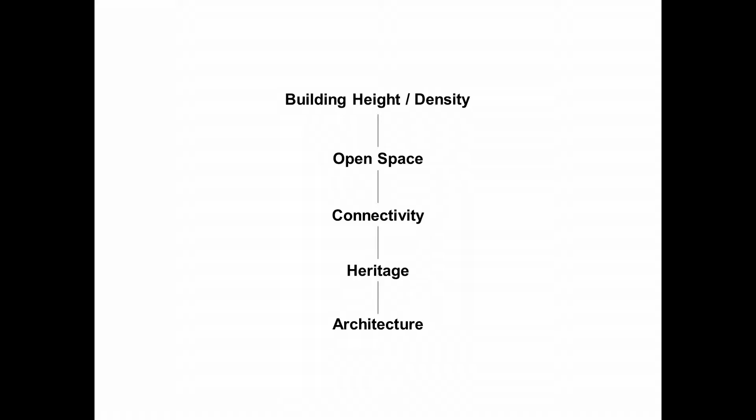Let's look at the issue of building heights, which is inseparable from the issue of density. Because building high used to be just a matter of ego, but in 20th century New York, 20th century Hong Kong, building high is actually a solution to our problems, and it's going to be a solution to most of the world's metropolises going into the future. It allows us to escape a scenario like this in Beijing or in LA.

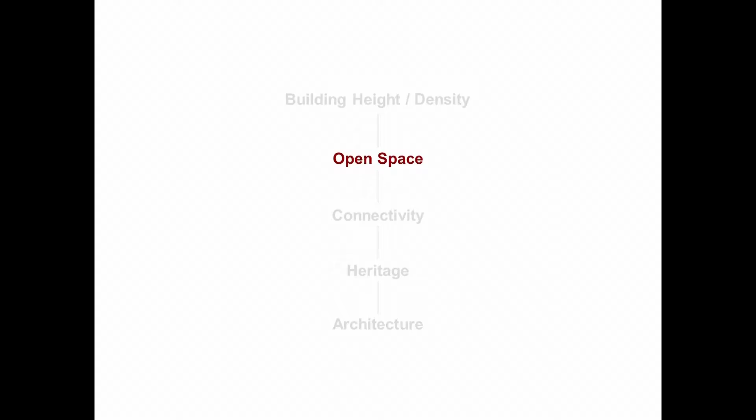The issue of open space is the other thing that needs a consensus, I think, on how to move forward. Because we are not New York, we don't have a Central Park. We're not London, we don't have a Hyde Park. We do have a series of pockets of open space distributed somewhere, for historical reasons or whatever reasons.

We could always ask for more, but I think we should ask for something else - better quality and better accessibility instead of just asking for more. I've always advocated that once we had this waterfront promenade in place, we should link our existing parks and gardens into one continuous whole. So when we designed Tamar, creating this green carpet was really with that objective in mind, completing a vital link between the future waterfront, the city, Hong Kong Park, and hopefully the botanical gardens.

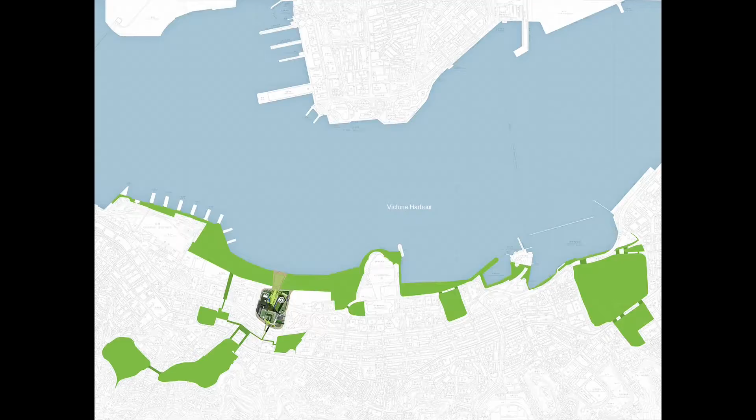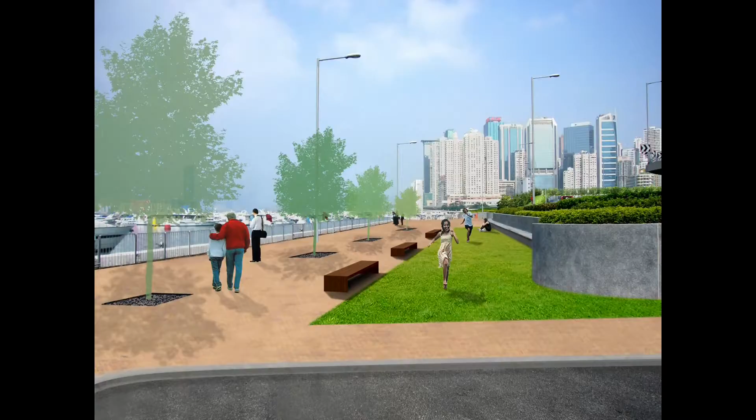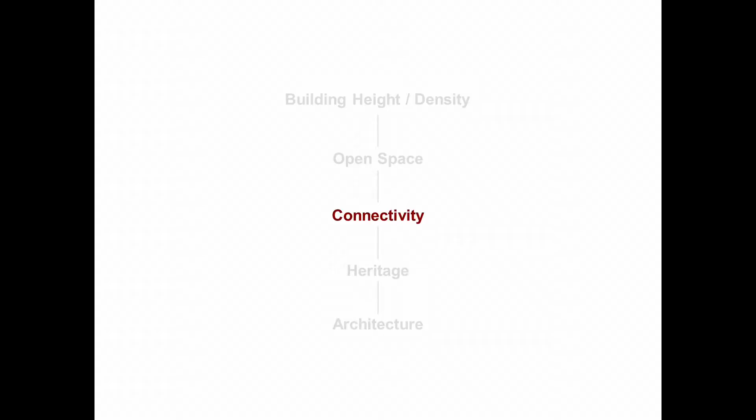We talked about a lot of connectivity, but we have to realize that connectivity is not just connecting point A to point B. This is not what we want, although it serves the purpose. We are talking about an integrated connectivity - spatial and visual integration, a fusion of the public realm and the private realm to make it interactive.

When we talk about heritage, we should not just be talking about keeping things as it was. We should be talking about energizing it. One of the things that could energize things is to add new elements, like the roof on the Lyon Opera.

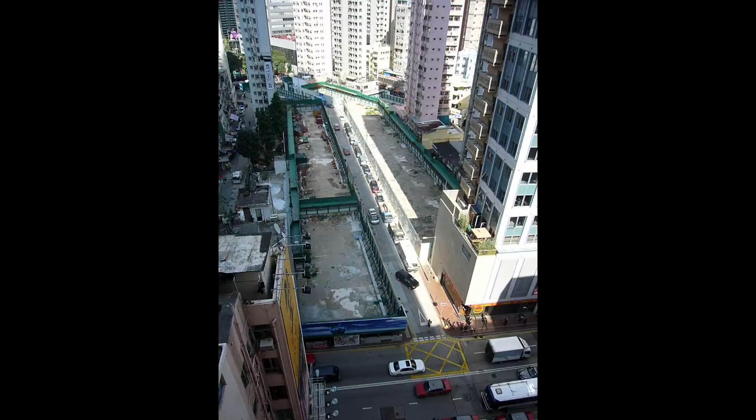So when it comes to the east wing or the west wing of the central government offices, what I had hoped for was some creative intervention of the new, which didn't happen, unfortunately. The same applies to redevelopment of whole districts - we don't want wholesale demolition, but we can't afford to keep things unchanged. So what we should be looking at, something we did for Guangzhou, is introducing something new to integrate with the old so that 1 plus 1 is greater than 2.

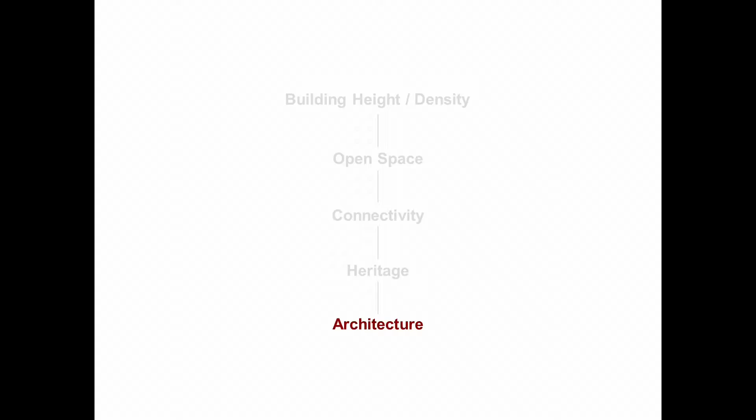Which really brings me to this last point: in these traditional streets, it's not just the public realm, it's the buildings around it and the whole ambience that contribute. So architecture is an important element in urban design because it provides the proper setting and contributes to the ambience of the place. Once upon a time, we had architecture that could do that - nothing spectacular, but something human, with proper scale.

But since then, these become the norm. And when it comes to economy of operation, standardization of bay windows, balconies, and so forth have all led to rather inhuman architecture that did nothing to enrich the urban environment. Not only that, our current building laws have left us with almost just one building typology - a tower and a podium. And the worst case is that the podium is a car parking podium.

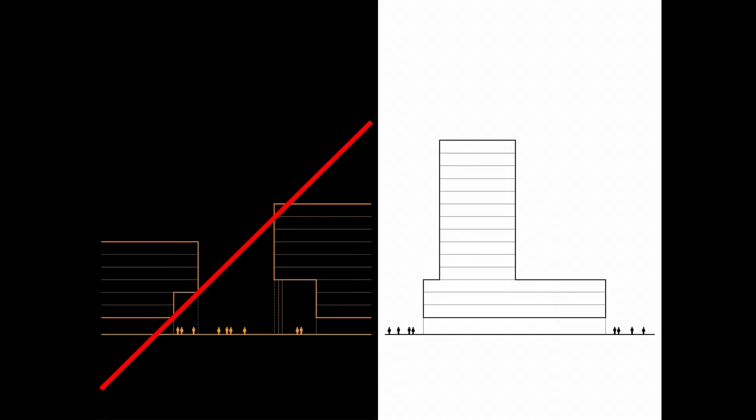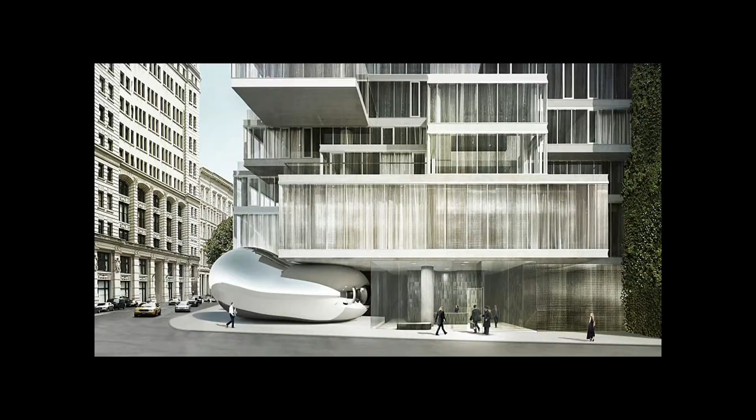So we want to create something creative. That is not encouraged under the building code unless you are willing to put up with great loss of development potential. That is not a profile that is permissible under the building code - nor that. So projects like these, probably something a final year student could dream of, are not possible, simply because they're practically not encouraged. Nor that, nor these.

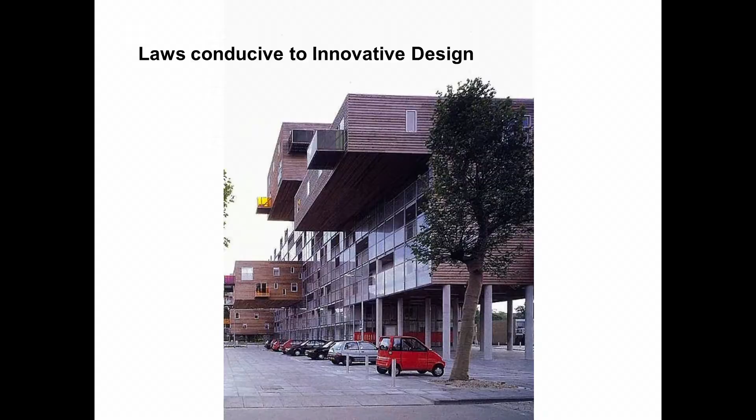So what we need are new laws, building codes, that are conducive to innovative design - and that is the last factor in creating a better urban environment. So what I had hoped for is that we have a new metro plan that could consider holistically a combination of all these issues, and a review of the buildings ordinance that could consider, apart from safety and health, all the issues related to good architecture.

Now, that was 2008. The dream didn't come true, of course. There's no review, there's no metro plan. Today is the 22nd of April, 2016 - so where are we now? Now, Kerry just worried that I would be too critical. Don't worry, actually things are not that bad.

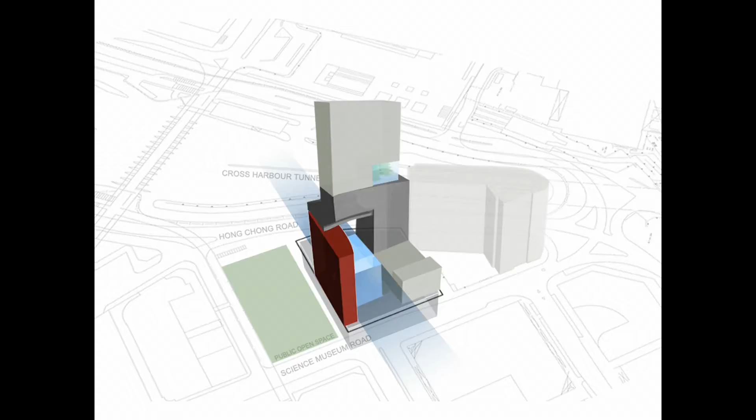On the issue of building height, we won some battles to break away from an artificially kept low height for some buildings, like Hotel Icon on the waterfront. We argued with the planning department and the town planning board that by breaking the heights, we managed to create a building that is visually permeable, that has ventilation through its middle, enhancing the microclimatic condition on both sides. And it is transparent.

It also allows us not to occupy fully the ground, creating courtyards both on the hotel side and on the school side. And it allows us to use levels up in the air for meaningful amenity usage. And when you look at it from the waterfront, although it does stand out, it's actually part of a fairly natural skyline. I'm glad to learn that since then, the planning department has relaxed the height restriction of all the buildings on Tsim Sha Tsui East, so that in future, if they do develop, they would probably not have to have really solid blocks all the way down to the ground like that.

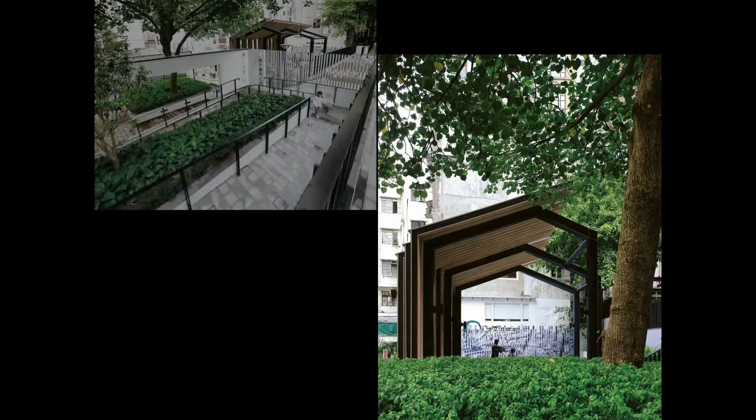On the issue of open space, we have since 2008 a number of really well-designed open spaces with quality and reasonable ease of access, like the Kwun Tong waterfront, credit to ASD and the Kowloon East Development Office, like Oil Street Depot, a courtyard devoted to community use, easily accessible for the community in the neighborhood. Pak Tsz Lane, credit to Ronald Lu and Partners, and the Kwun Tong open space and art space, again, easily accessible to the community, well designed.

If you recall, when we suggested a master plan for West Kowloon Cultural District, it's not really about how big the park is. It's really about how accessible and how connected it is to the surrounding district. I'm hoping that when the West Kowloon Cultural District is realized, the issue of accessibility and the quality of usage of open space could be duly addressed.

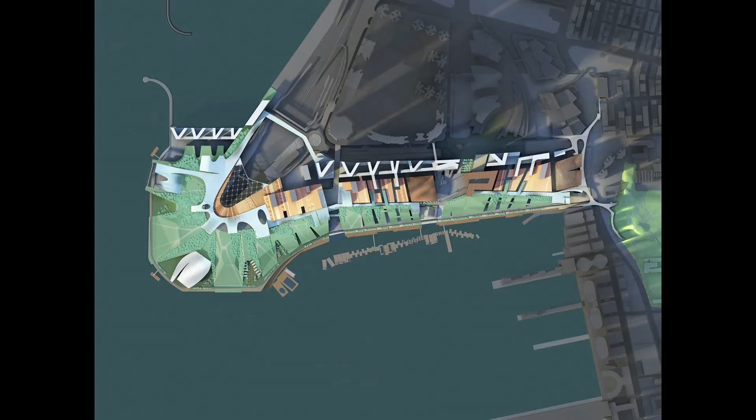Luckily, we completed Tamar. It's an open space that allows people to relax, to enjoy, to have a proper relationship with the harbor, and to allow the moods of the city in various forms to express itself.

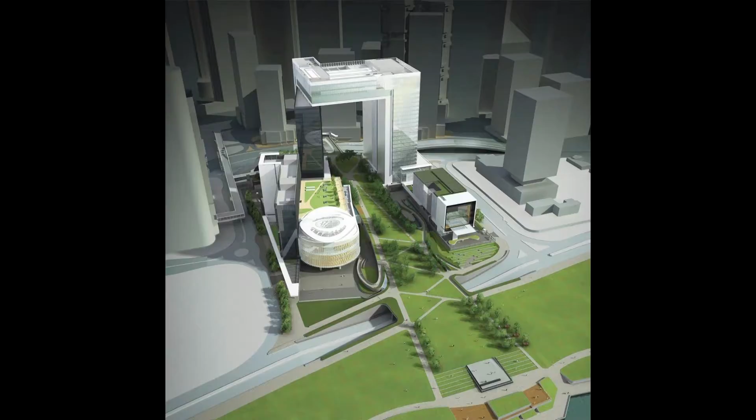But apart from being a park, it's also enhancing the city's connectivity. Connectivity that allows a grand passage between the inner city and the waterfront that the public could use without interfering with the daily activities of both the legislature and the executive on either side. The connectivity is integrated both visually and spatially with the architecture.

However, I have to admit that not everything is perfect. Although this is working well, at the end of the connection on the south, where we had expected a multi-level and multi-directional connection to the city, everything is just not happening. And then, although it's not crucial to the concept of connectivity, it's still a regret that some of the public spaces, well, not really public, statutory, are not readily accessible to the public.

Now, we've done, again, much better when it comes to heritage. This is a dubious start, but we have since then had many good examples where the heritage is respected and energized with a suitable addition of new elements, like the Jao Tsung-I Cultural Center, credit to P&T and Metaphor, like the Comic Center, credit to IADIS, the PMQ, the Secretary Carrie mentioned, credit to ASD.

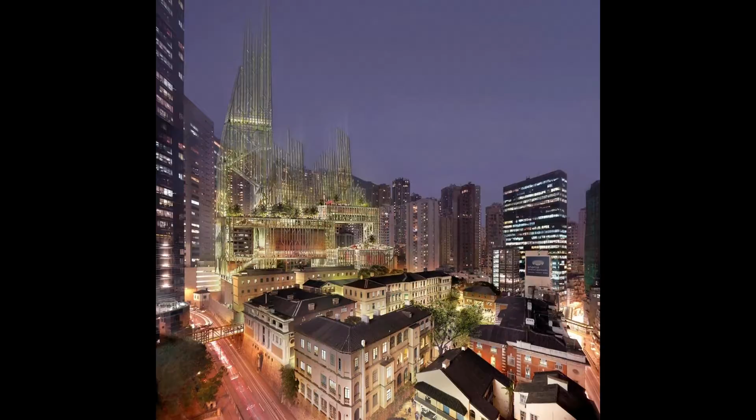For the Central Police Station, perhaps there was some initial Herzogian overreach, but we since worked with the Jockey Club to establish an appropriate integration and introduction of new elements. So by the end of the year, when this is open, this is what you will be looking at.

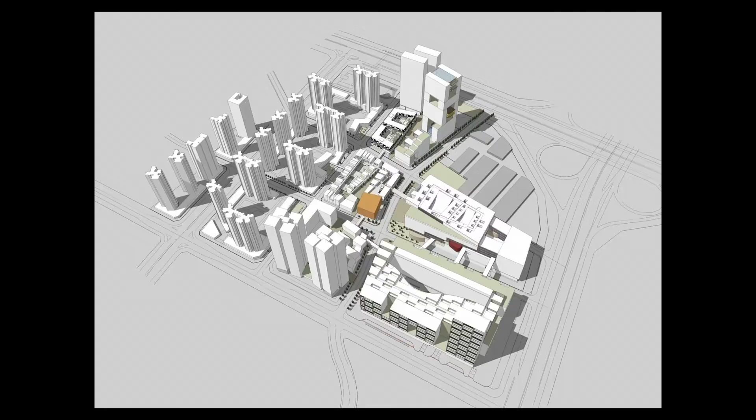On the other hand, we have been able to do something slightly better in a city other than Hong Kong, like Shenzhen. We did a master plan for a district in the northwestern part of Shenzhen, comprising a mart, which is the anchor building, and a small township with emphasis on human-scale streets and squares, walkability, permeability, and the interface between the public and the private.

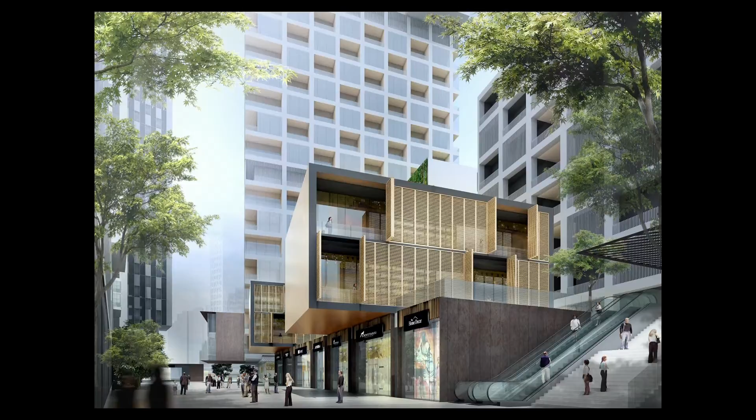And we could do that for a residential building, something you could never do in Hong Kong. Not with the huge atriums that would be accountable for GFA, not with the sort of stepped profile that would not be in accordance with the permitted coverage and plot ratio schedules. Even a simple gesture like a cantilever over a street to enhance interaction between the private and the public would not be encouraged, let's say, in Hong Kong.

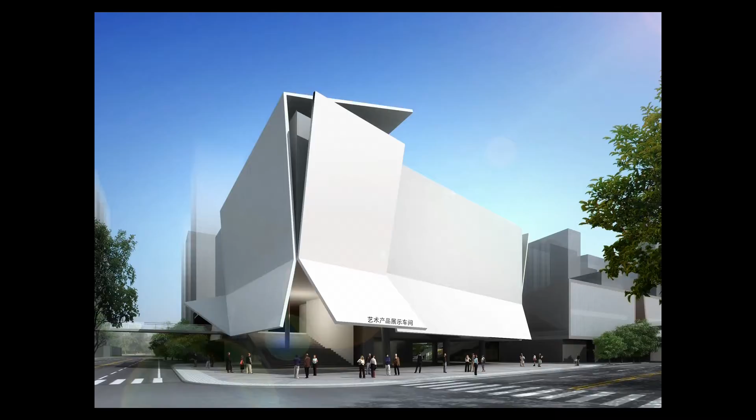And then we have a little museum at the end of the road, a design museum, and all the space underneath it is not GFA accountable, because the government accepts that it is really used by the public more than the private. Again, this used to be possible in Hong Kong once upon a time, but is no longer possible.

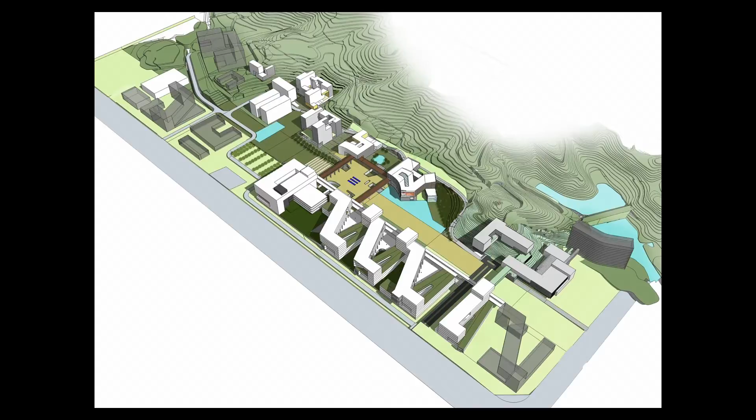For our design for the Chinese University in Shenzhen, it's the same. We create a series of buildings meant to encompass a diversity of open and semi-open spaces that are conducive to interchange and a sense of community.

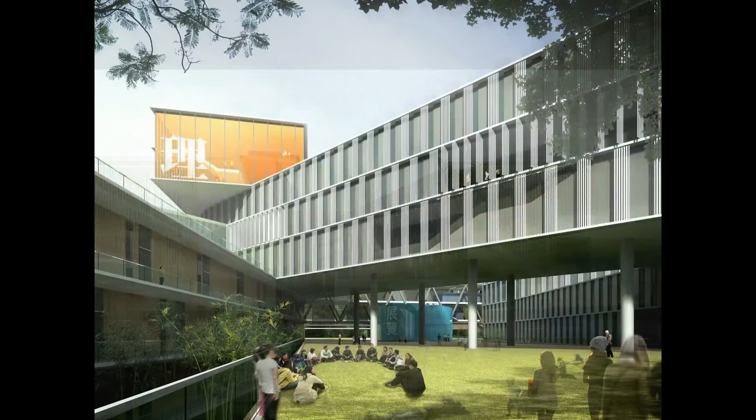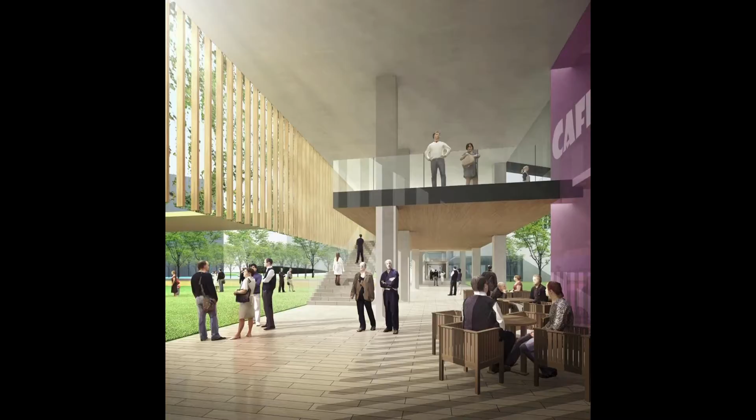Now, they have rules too. They counted the areas underneath it as GFA. They also counted the area under the deck as GFA. And they also counted this area as GFA, maybe not the overhang. However, they recognize that because this is an academic building, even though our overall GFA has exceeded what is permissible, they give it an exemption, which means they encourage it.

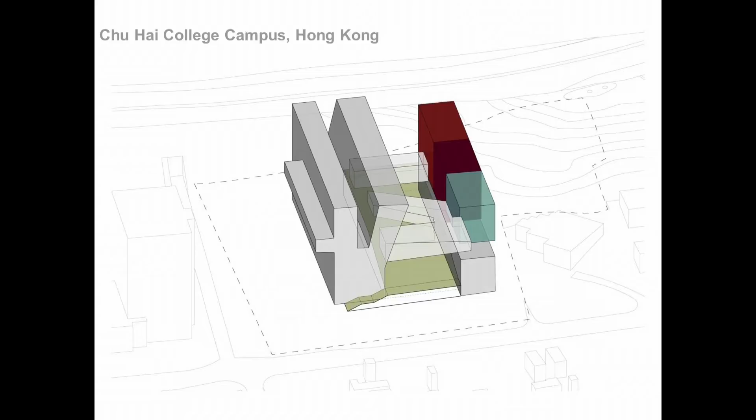Now, back in Hong Kong, the Chu Hai campus—we did something unusual. Luckily, we have a sloping lawn underneath the overhanging library, so we are not required to count that for GFA. But they do require us to count the staircase as GFA because it's walkable, and they have to count all these, of course, as GFA. It's lucky that the client is willing to accept that loss.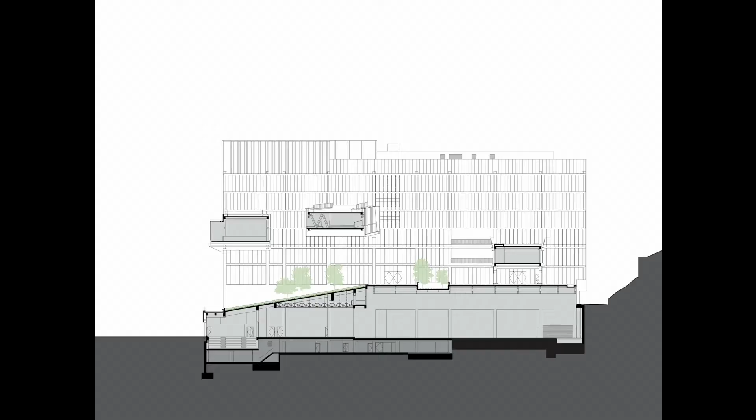And when it comes to building volumes, because this is a sports hall, and the lecture theatre all around has a common area with a larger headroom, they only allow it if we put in a series of what they call anti-abusive features on the ceiling, which support nothing—they're just there to prevent you from adding something on later. That's fine. At least we got partially what we want.

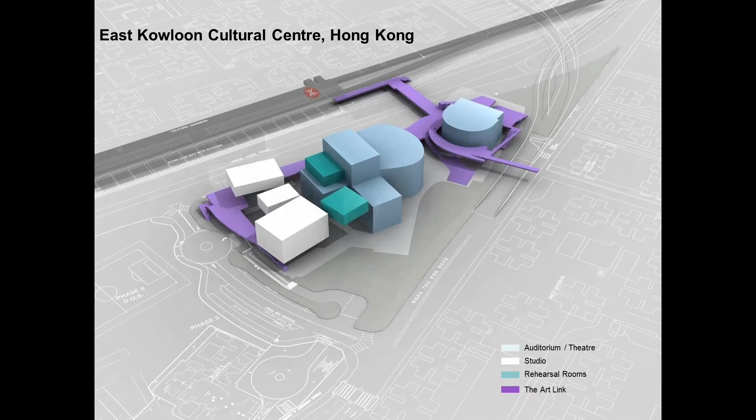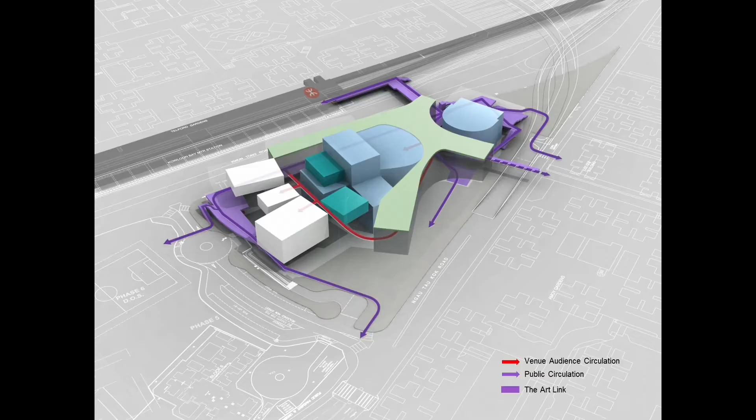The other project, East Kowloon Cultural Center, is a cultural complex of 2 cinemas, 2 theaters, and a series of ancillary places. The key to this building relies on an integration of a public realm that is an extension of the circulation network in the neighborhood, so the public space serves both people attending events and people commuting daily within that district. This creates a space where culture can be shared by all, and where, even though it's a cultural center, it will not become a white elephant when there are no events.

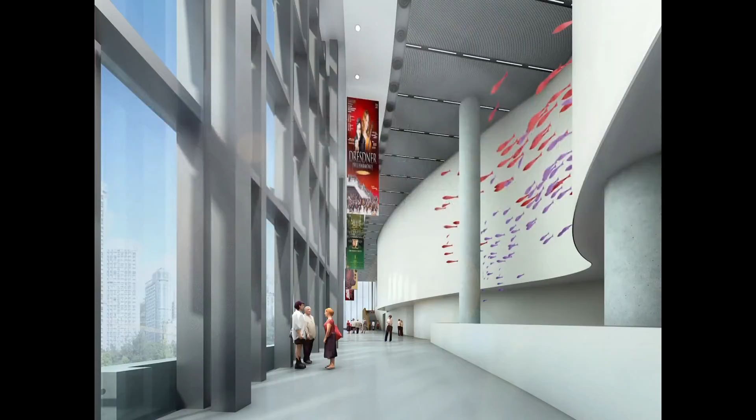But again, all this comes at a price, because all these public areas you see are of such a height that they have to count for more than one level of GFA. That's only possible because, for some reason, this site has a permissible plot ratio way above what the client is prepared to build, so that is not a problem.

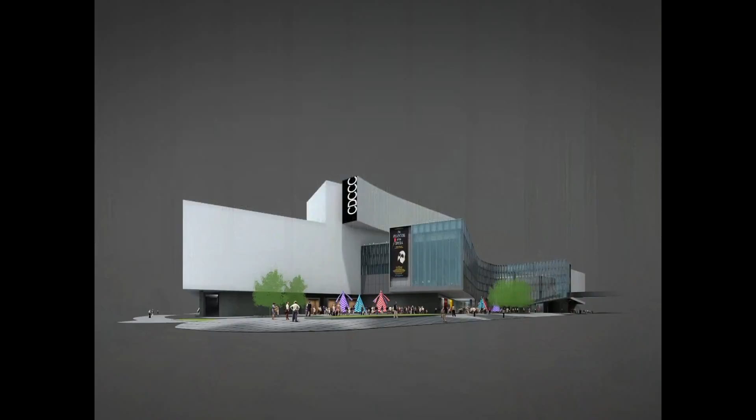But what I want to say is, these are the exceptions. These are not the norm. And for most of us in Hong Kong, that is the norm. And that is compromising our efforts, not as architects, but as urban designers, where architecture is an important backdrop of the city, where architecture actually helps shape urban spaces and places.

So we don't have that dream realized—the Metro Plan and a review of the Building Ordinance in 2012. It's unlikely, I should have asked Kerry, that it will happen by 2017 nor 2022. However...

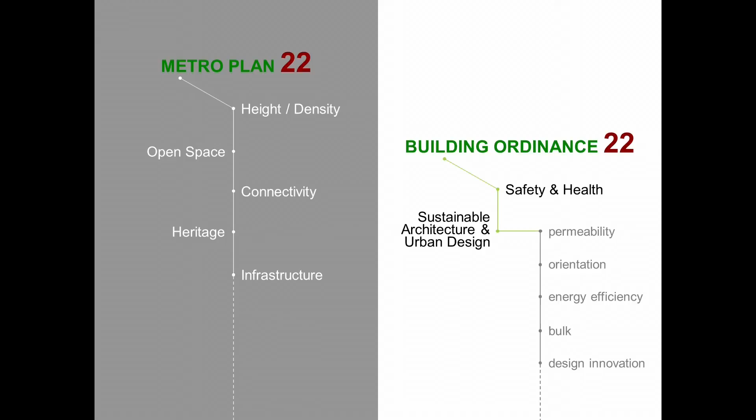I think that if we don't have things from the top down, change should always come from the bottom up. If we keep our dreams alive, if we have our convictions on the approaches to all these issues I mentioned, then collectively, if we take our chances when exceptional circumstances present themselves, we might be able to contribute to moving forward our dreams for the betterment of a city. Who knows? One of these days, this fence might come down, and this link might yet be made possible. Thank you.